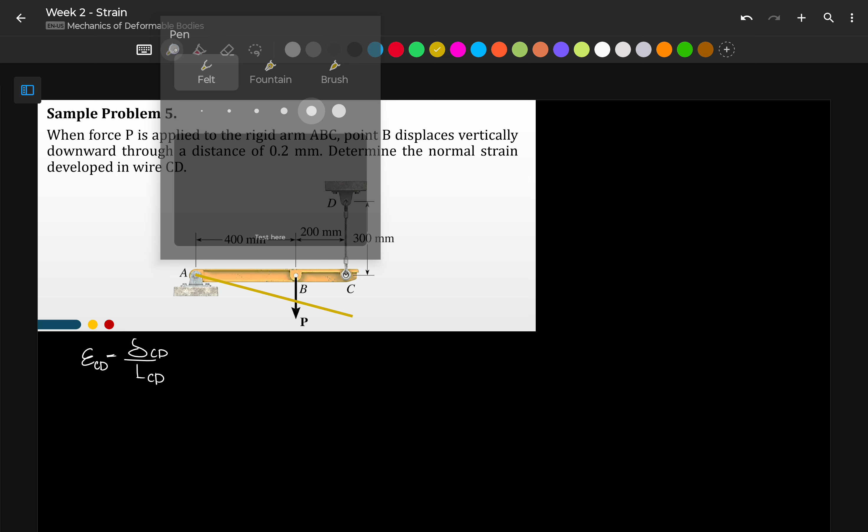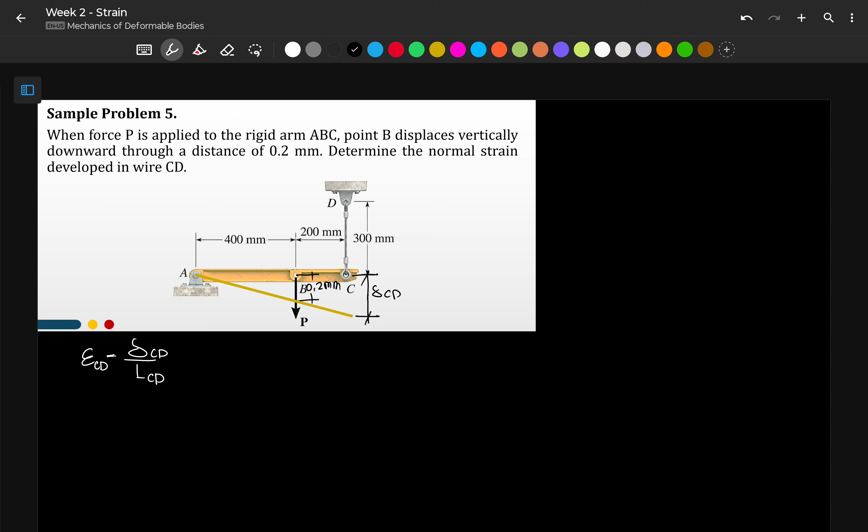Sorry for that. So ang nangyari is nag-deflect yung ating bar, yung rigid bar natin. So yung rigid arm na ito nag-deflect down ng 0.2 mm, and this point is our deformation CD. Now take note that the arm is rigid, therefore hindi siya magde-deform in any way. So perfectly rigid siya, straight line pa rin siya.

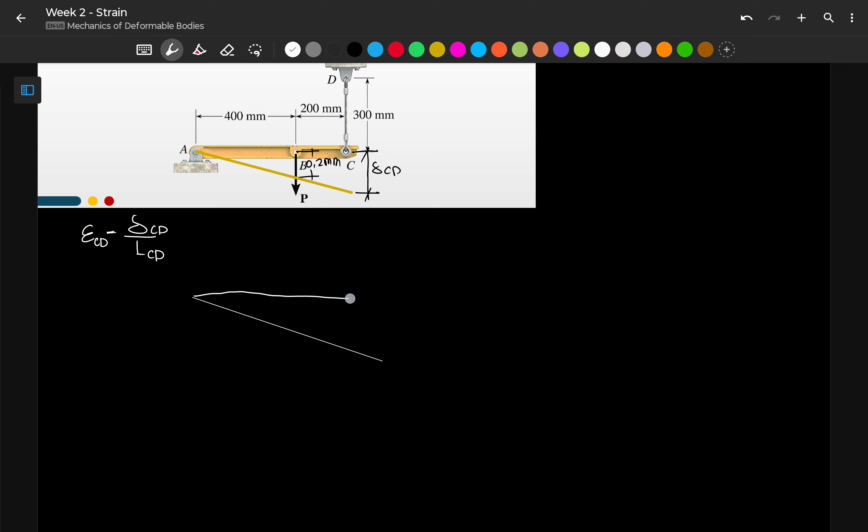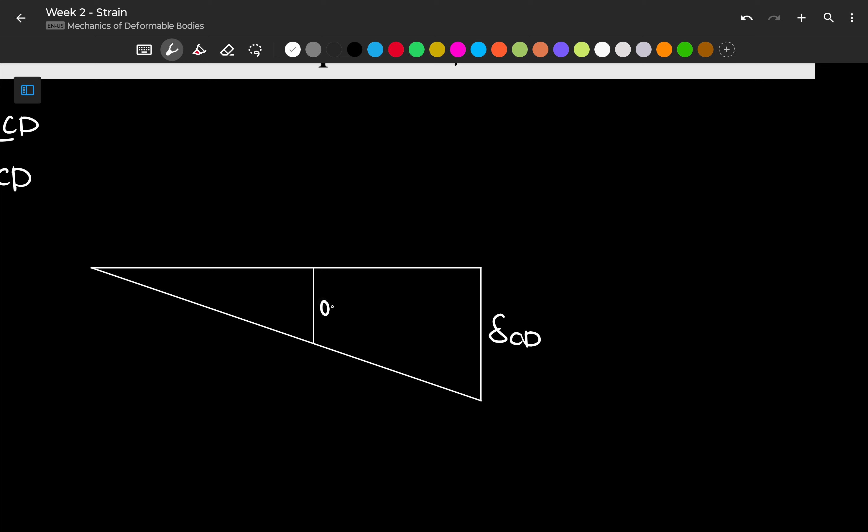So let's draw the deformation diagram. So what we have here is our rigid arm deformed, and this is our original position. At yung vertical distance, ito yung ating deformation CD, so let's call it deformation CD. And then at this point, we have a vertical line. Then this vertical line, sabi ng problem, ito yung displacement or yung deflection na 0.2 mm.

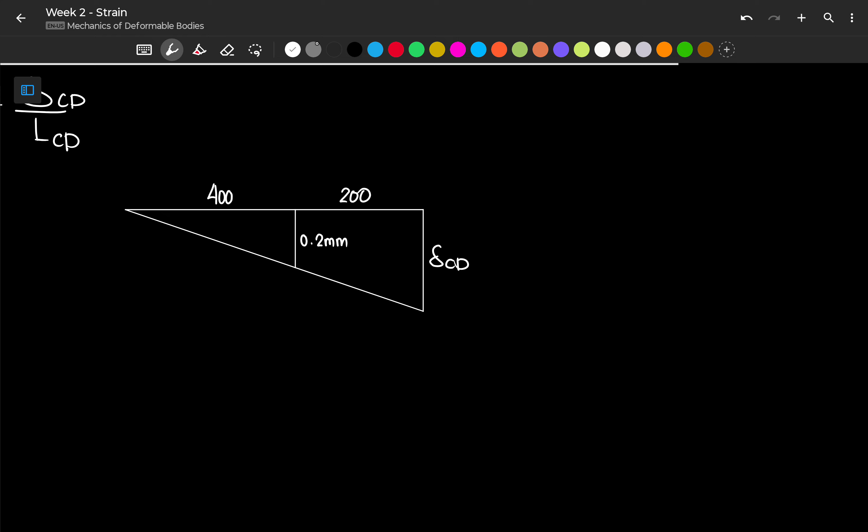And the distances are 400 dito, and then meron naman tayo ditong 200. So dito pwede tayong gumamit ng similar triangle theorem or yung ratio and proportion. That is, yung length ng mas maliit na triangle, which is this one, okay, the length of the smaller triangle over its height, that is equal daw dapat sa length ng mas malaking triangle over its height.

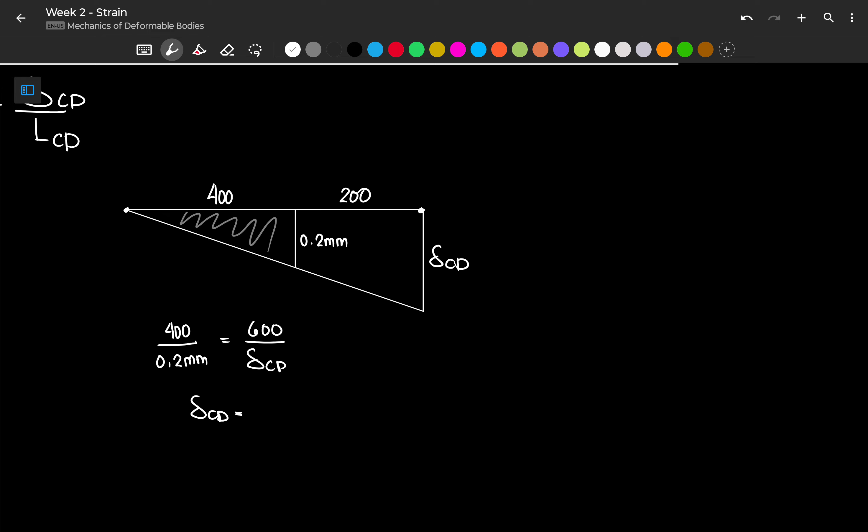Okay, so yung maliit na triangle, we have 400 yung kanyang length, yung kanya namang height ay 0.2 millimeter. That is equal sa length ng mas malaking triangle from here to here, that is 600, over deformation CD yung kanyang height. So our deformation CD is 400 over 0.2 times 600, we have 600 times 0.2 over 400. We have a deformation of 0.3 millimeter.

So maliit lang yung deformation. Since we have the deformation, we can now calculate the strain as the deformation 0.3 millimeter divided by our length na 300 millimeter. Yun yung original length niya, yung haba nung ating kable mula kay point D hanggang kay point C, which is 300 millimeter. So our strain is 0.3 over 300.

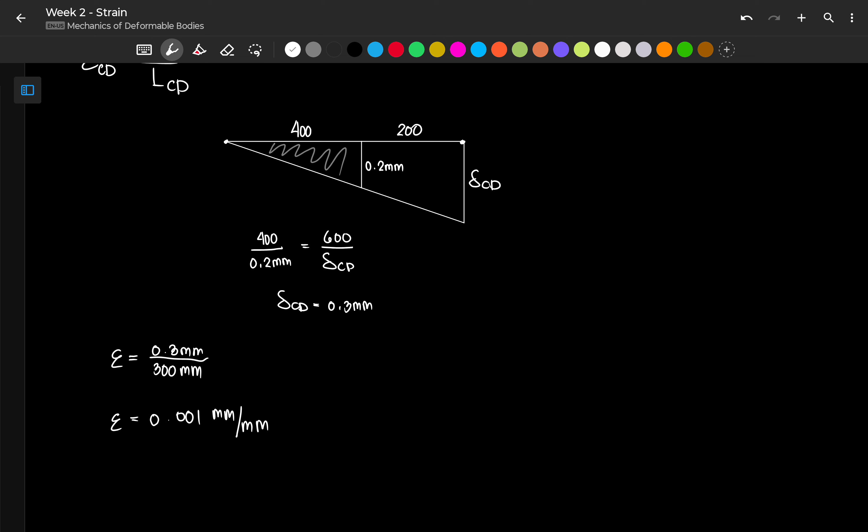That is 0.001 millimeter per millimeter. Okay, ibig sabihin, kada isang milimetro ng ating material, ang kanyang deformation ay 0.001. We can also say na pwede rin niyang 0.001 meter per meter. So the unit of strain is millimeter per millimeter, or pwede rin namang meter per meter.

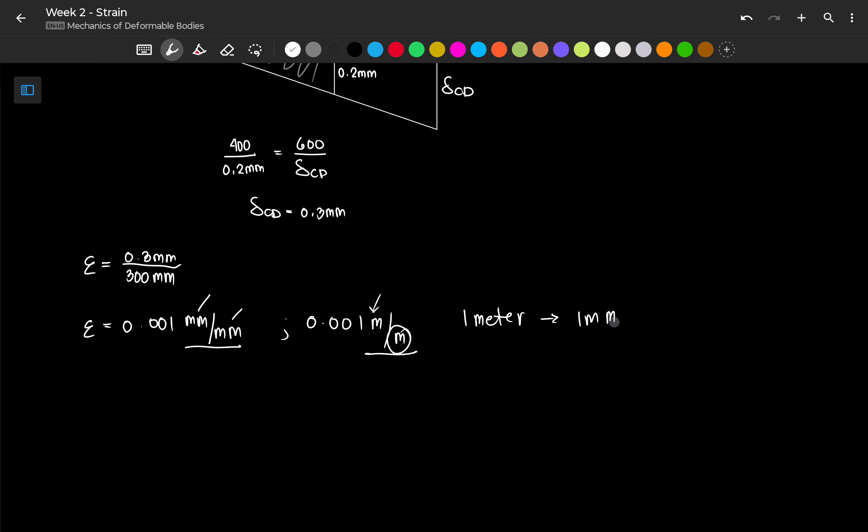Basta siya ay length over unit length, kasi dati siya ay deformation over length. Okay, so we can say na every 1 millimeter or every 1 meter, kada isang metro, merong 1 millimeter na deformation doon sa ating wire.

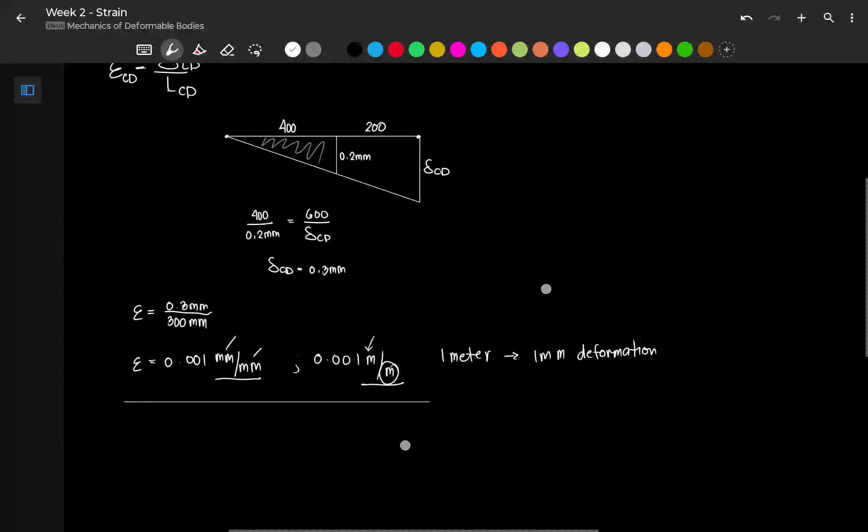So ito yung ating sagot, kahit alin dito pareho lang po yan. Okay, so pwede rin unitless, sometimes yung strain ay treated as unitless value.

Let's proceed with the next problem. Sabi dito, two solid cylindrical rods are joined at B and loaded as shown. So rod AB is made of steel with E equivalent to 200 gigapascal, and rod BC of brass with E equal to 105 gigapascal.

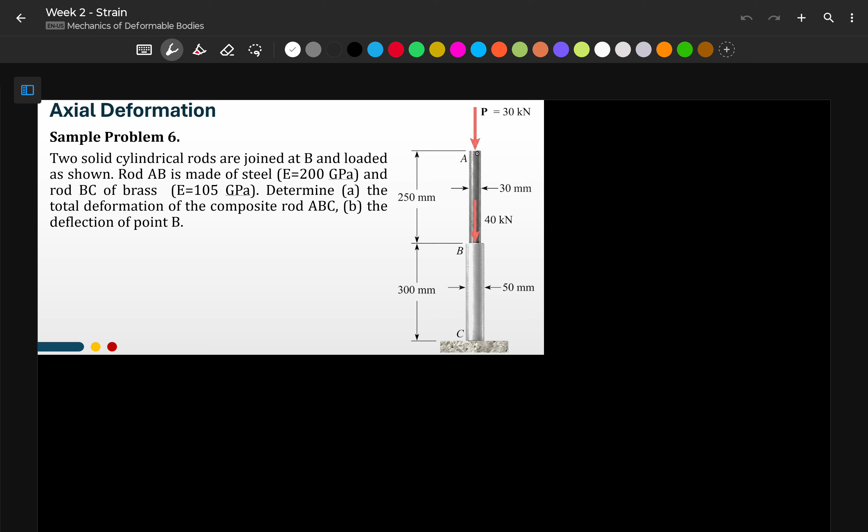Determine A and B: letter A, the total deformation of the composite rod ABC, and letter B, the deflection of point B. So dalawang tanong sa atin. Una, the total deformation of our rod ABC, yung buong rod natin na ito. So if we want to solve for letter A, ang sabi sa atin, total deformation, that is the sum of the deformation natin sa AB plus yung deformation natin sa BC.

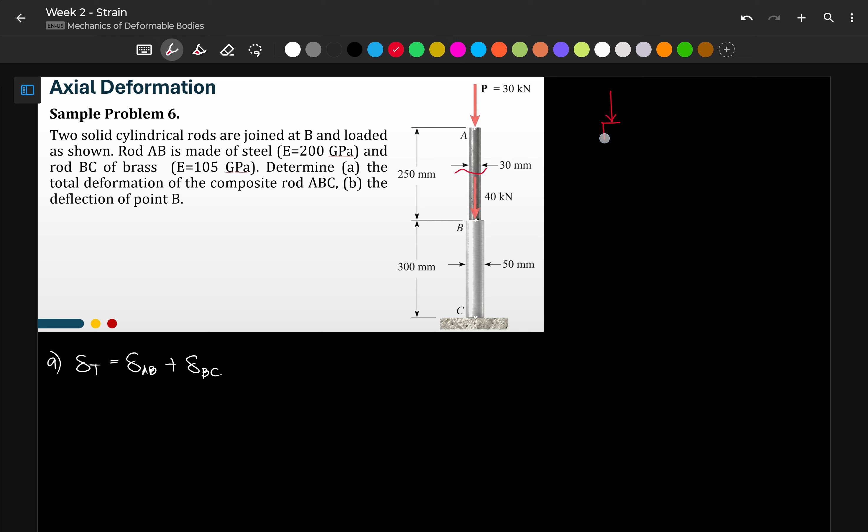Okay, so if we cut a section here, pag nag-cut tayo ng section dito, meron tayo ditong P na 30. Then meron tayong internal reaction, this is 30 kilonewton. Then magkakaroon tayo ng internal reaction, let's say PAB. So this internal reaction, by summation of forces vertical, we have PAB is equivalent to 30 kilonewton.

Then next, we have the lower member which is the member BC, so i-cut naman natin dito. Ang maiiwan sa atin sa itaas, nandyan pa rin yung AB. Then we have, ano ba tawag dito, this is what, a brass rod. Okay, so ito ay meron pa ring applied load na 30 kilonewton, then dito meron tayong 40 kilonewton, then meron tayo ditong reaction.

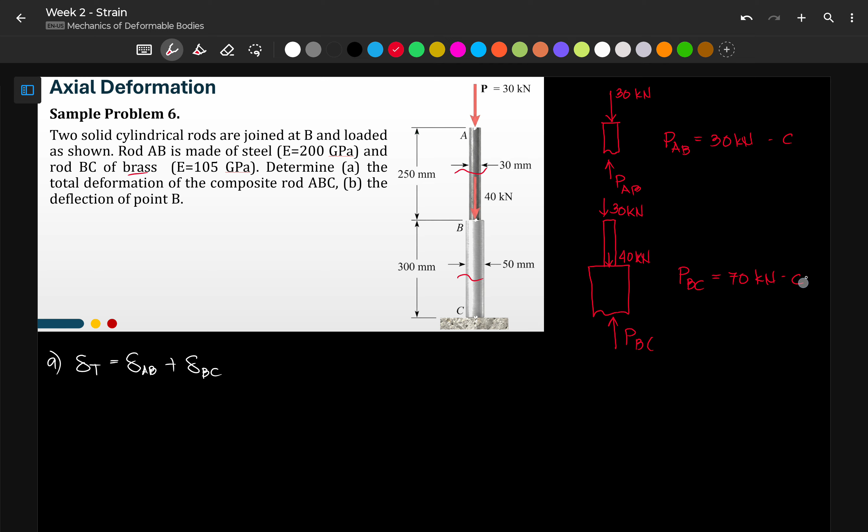Let's call it PBC. By summation of forces vertical, we can say that PBC is equivalent to 70 kilonewton and they are both in compression, meaning nagko-compress yung ating material. So kung kailangan ng notation or symbol to distinguish yung ating deformation, pwede tayong maglagay ng positive or negative — positive for elongation, negative for shortening. Or pwede rin nating ilagay yung word na elongation o shortening. Okay, so kahit alin doon, tama.

Ngayon, since meron na tayong force, that is our step 1. Given naman yung dimensions natin, the diameter of each rod, so mako-compute natin yung area. So pwede na natin kunin yung deformation. Our total deformation now is equivalent sa deformation ng AB plus BC. So instead na solving ko ng buo, solving ko muna isa-isa — yung deformation ng AB muna.

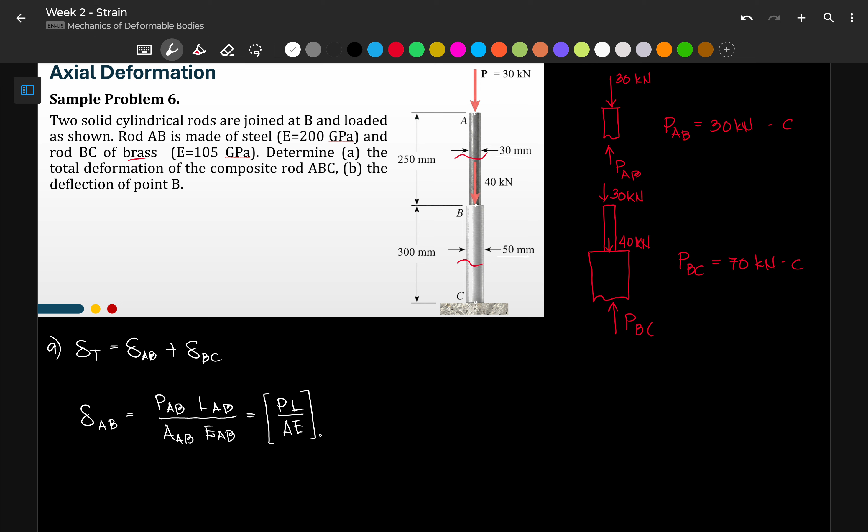So the deformation ng AB, that is equivalent sa P ng AB, length ng AB, over the area ng AB, multiplied sa E ng AB. Minsan sa pagsusulat ko, para hindi na siya maraming sulat ng subscript, ang ginagawa ko na lang, nilalagyan ko nito, tapos may subscript dito. Ibig sabihin yan, lahat ng variable dito ay para kay AB. Okay, so let's solve for the deformation sa AB.

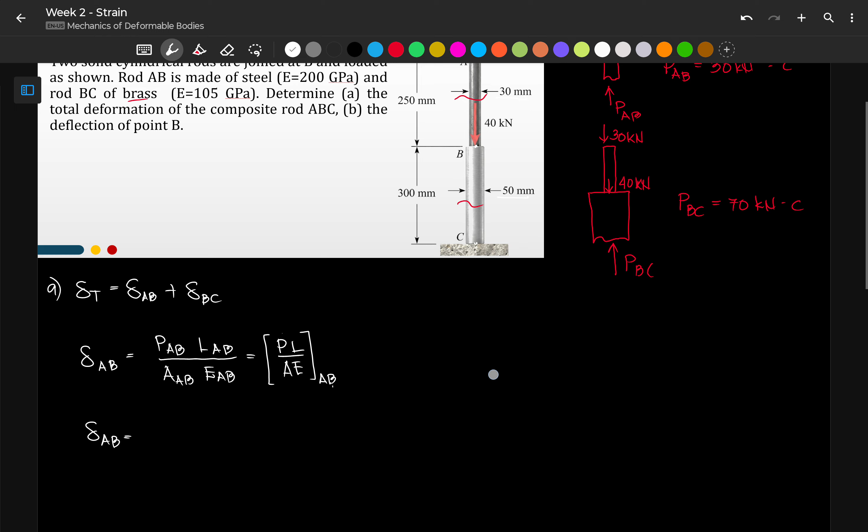Ang PAB natin ay 30 kilonewton, so that is 30 times 10 to the 3 Newton. Then our length for AB, that is 250 millimeter, divided by the area — may diameter tayo, 30 millimeter yung diameter. So the area is pi over 4 times 30 millimeter squared.

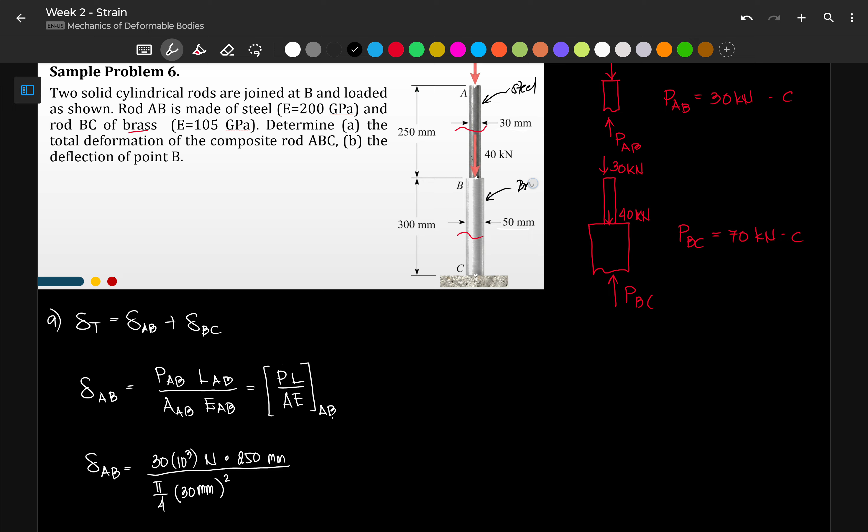Lastly, our modulus of elasticity — since AB daw is made of steel, and BC is brass. So our E is 200 gigapascal, that is 200 times 10 raised to 3 Newton per millimeter squared. Cancel na yung unit ng millimeter dito kasi may square din siya. Matitira sa atin, cancel na rin yung Newton, ang matitira ay millimeter.

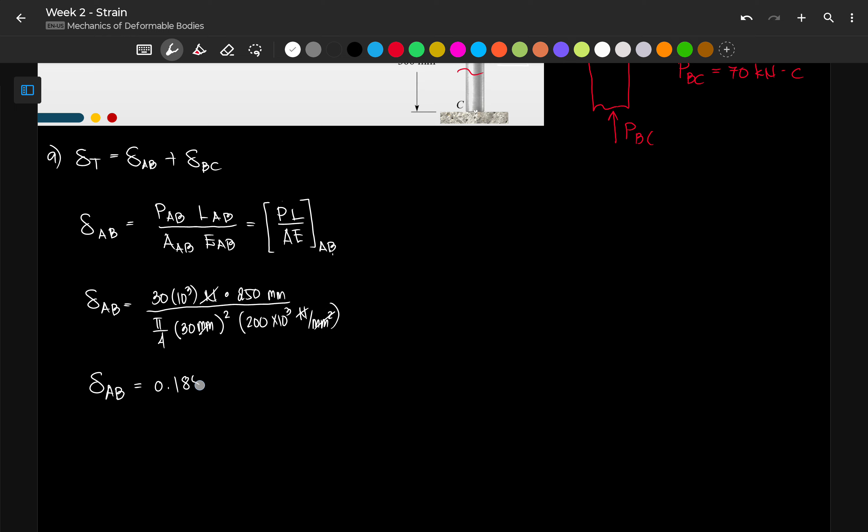So the deformation of AB is: we have 30 times 250 over pi over 4 times 30 squared times 200. We have here 0.1857 millimeters. Okay, next let's solve for the deformation ng BC.

So the deformation at point BC naman, that is equivalent to PL over AE ng BC. So that is our P, 70 times 10 to 3 Newton, times our length is 300 mm, divided by our area — the diameter is 50 millimeter squared, multiplied by our modulus of elasticity for brass, that is 105 gigapascal, or 105 times 10 to 3 Newton per millimeter squared.

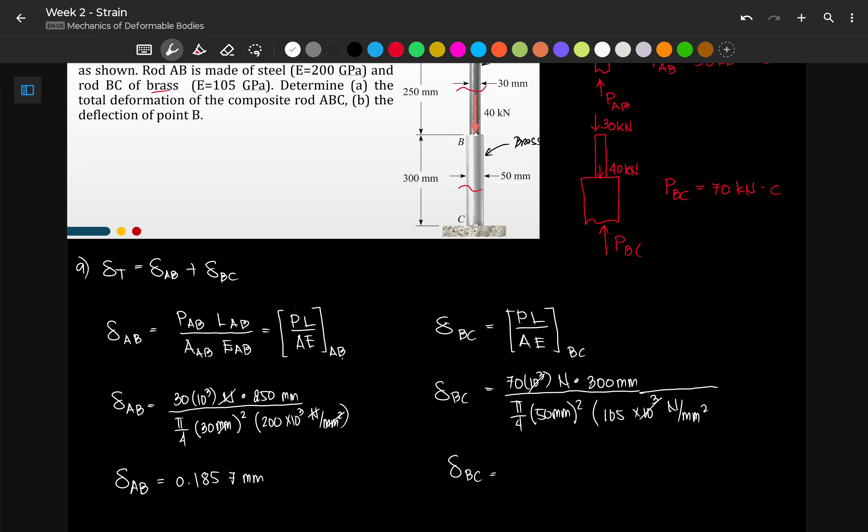So in this case, our deformation BC is 70 times 300 over pi over 4 times 50 squared times 105. Pwede naman kasing tanggalin itong times 10 to 3 dito, ayan, pareho lang naman yan, so pwede nating i-remove yan para hindi tayo masyadong maraming tinatype. So the deformation on BC is 0.1018 millimeter.

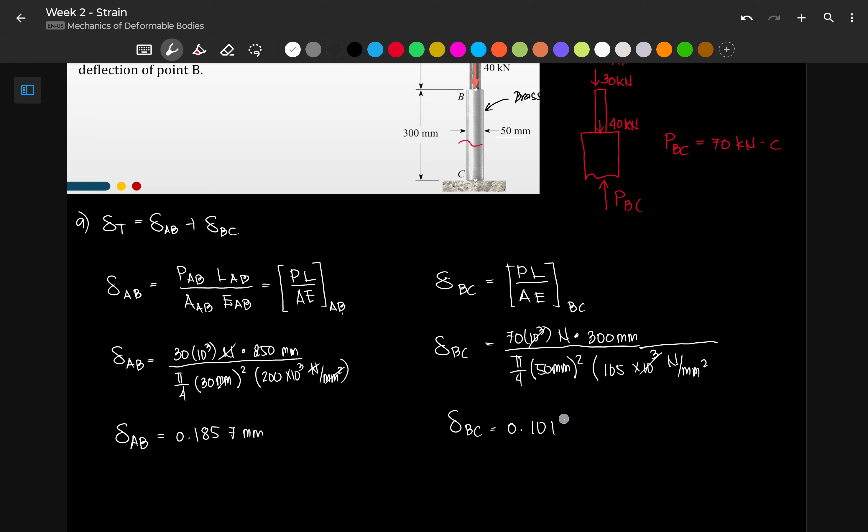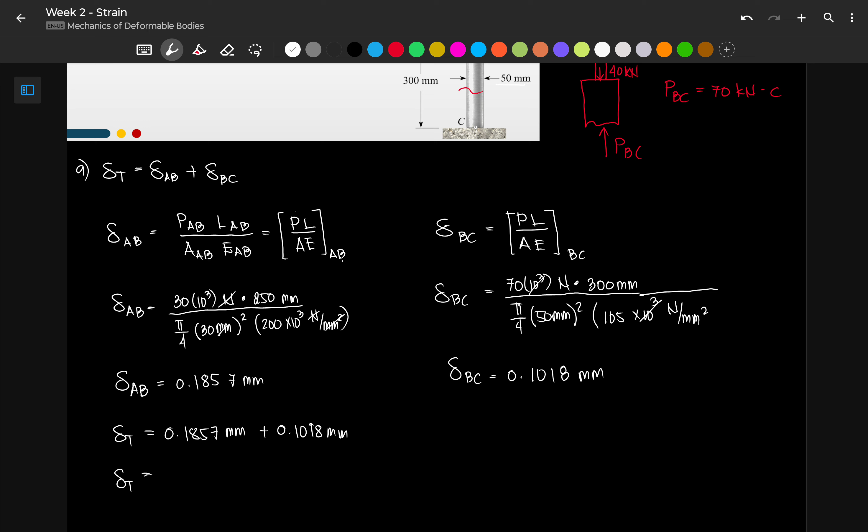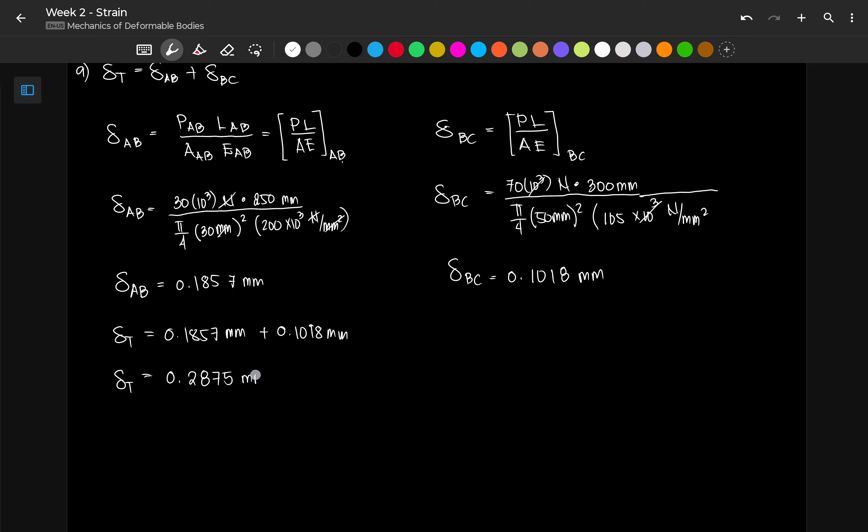And our total deformation is 0.1857 plus 0.1018, medyo nagmamadali na naman tayo magsulat dito. So we have here 0.2875 millimeter. So that is our total deformation, answering our question letter A.

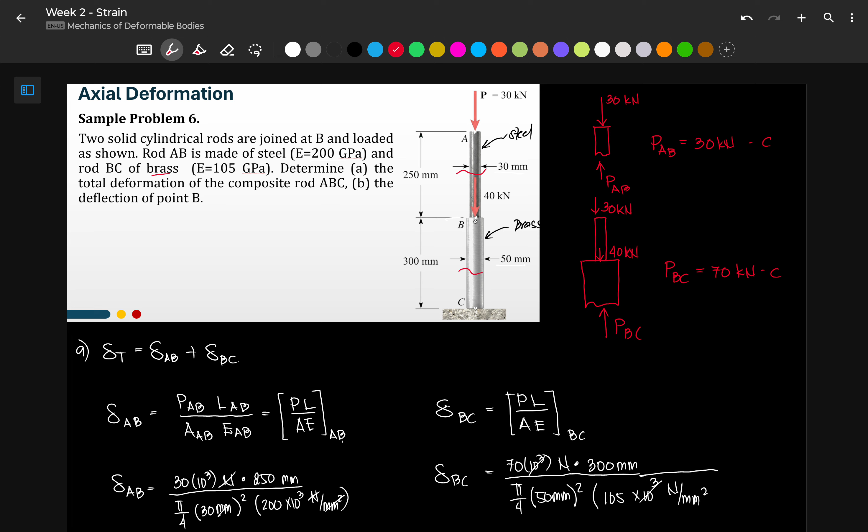So for letter B, ang tanong lang, deflection at point B. Meaning, bababa itong point B natin pagka nag-deform yan. Pag in-applyan natin ng load, ang tendency, mako-compress yung ating material, bababa. So ang mangyayari, kung yung ating original setup is ganito, okay.

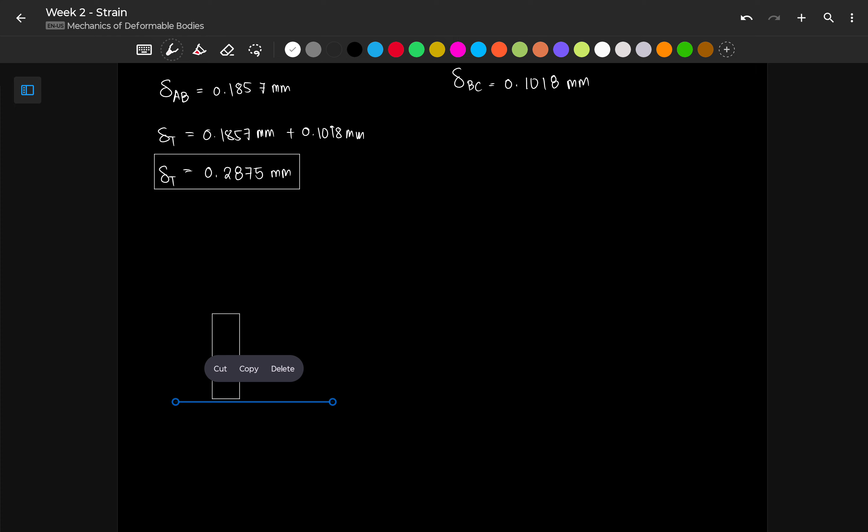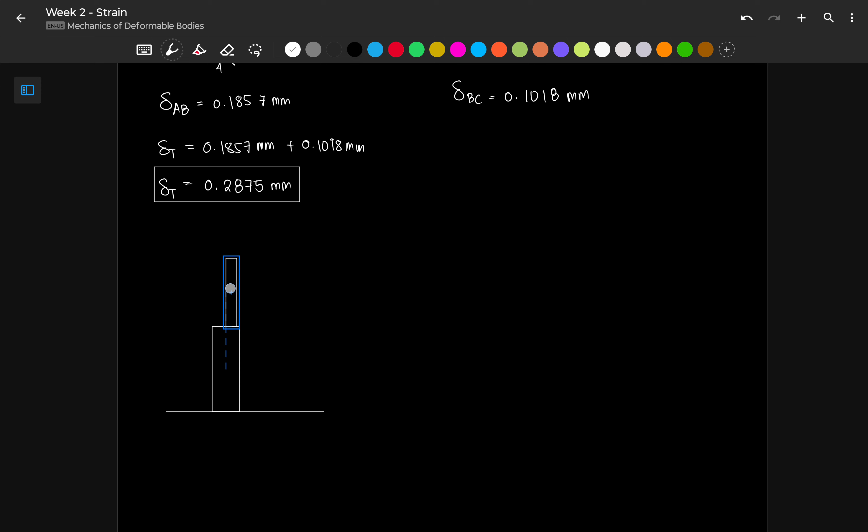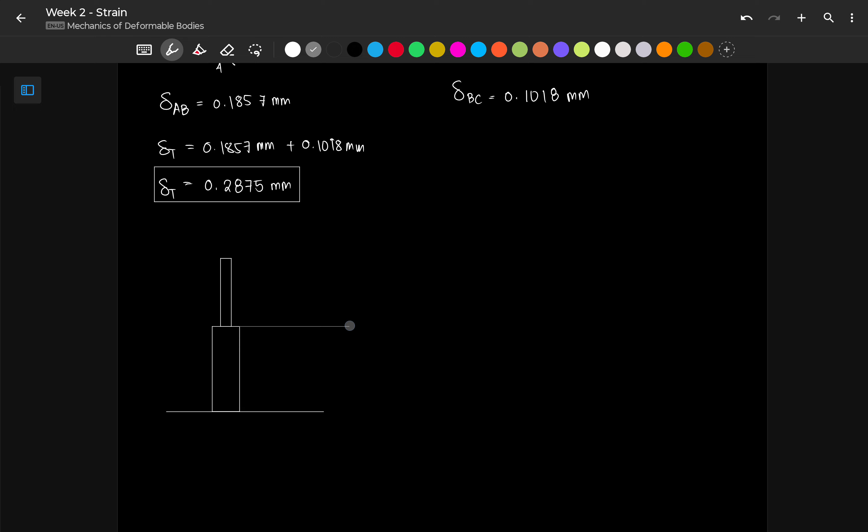Palitan natin ito ng white. Okay, then — ayan. So kung ganito yung original position natin, ang mangyayari kasi dyan, magko-compress. So what will happen is, isa-isahin ko yung compression para ma-visualize natin. Okay, so draw lang ako ng reference line dito ng point B. I-isolate natin si member AB — this is A, this is B, this is C.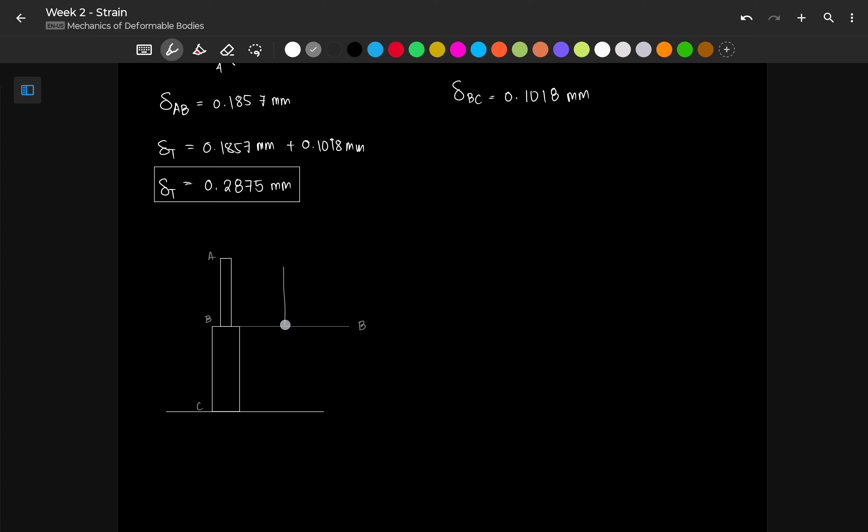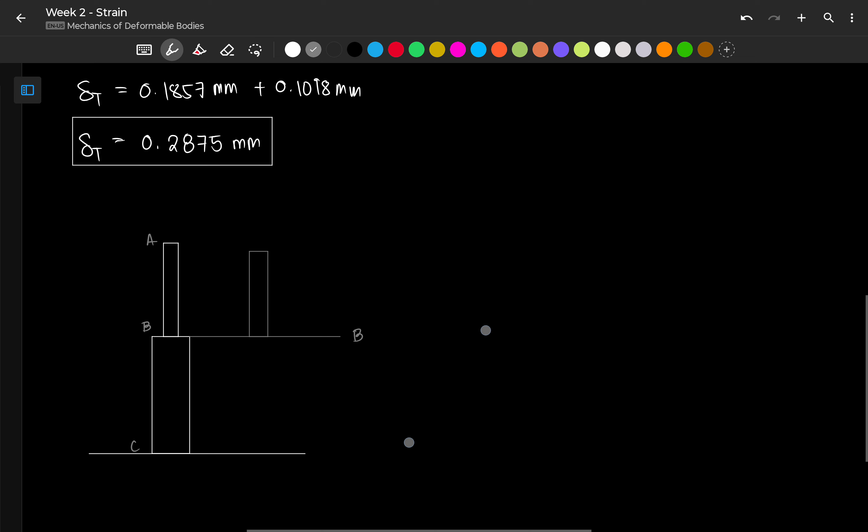Si member AB, ang nangyari sa kanya, nagkaroon siya ng deformation na 0.2 millimeter, so ang tendency, bababa siya dito. And then, similarly, si member BC, nagkaroon din ng deformation, so ang tendency niyan, si member BC, bumaba din.

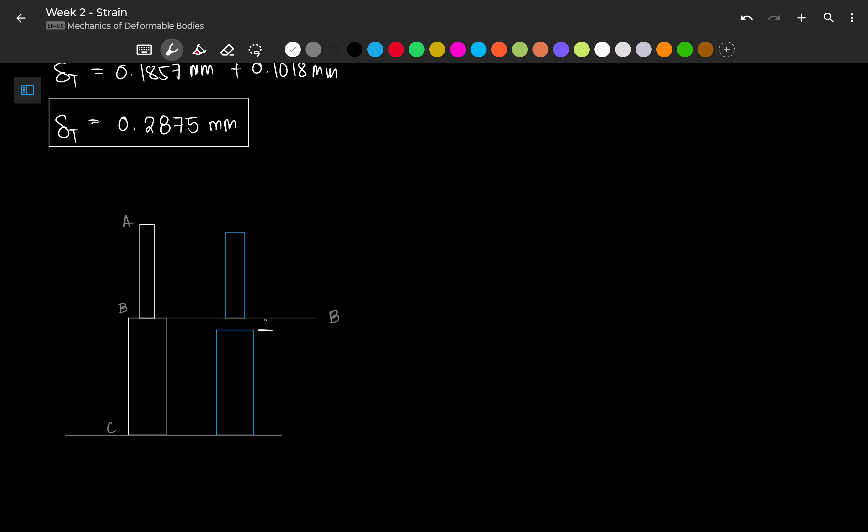Okay, so basically, after the two deformations that happened, ang nangyari doon sa ating member, sa ating point B, bumaba papunta dito. So yan yung tinatanong na displacement. Sometimes yung displacement na to is called deflection, at denoted din siya by delta — delta kasi is the term we use for change. Yung delta na yan, delta rin na ganito yung ibig sabihin niyan, no? Okay, so parehong delta yon.

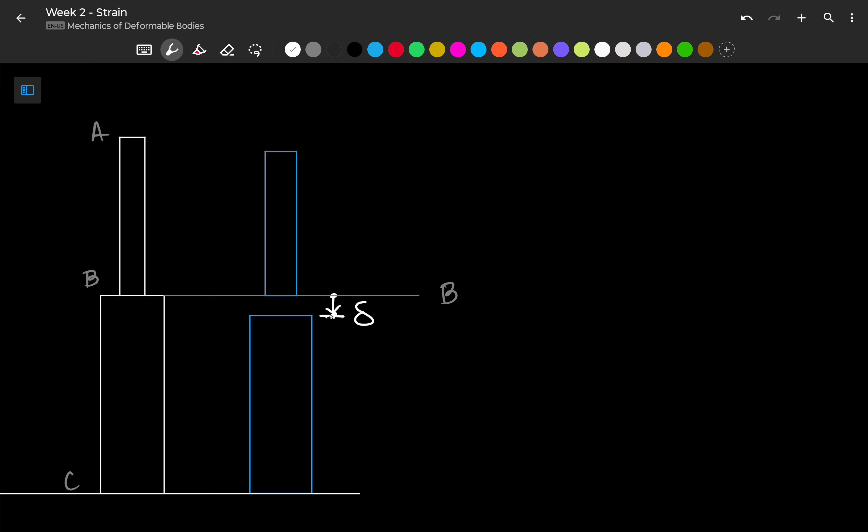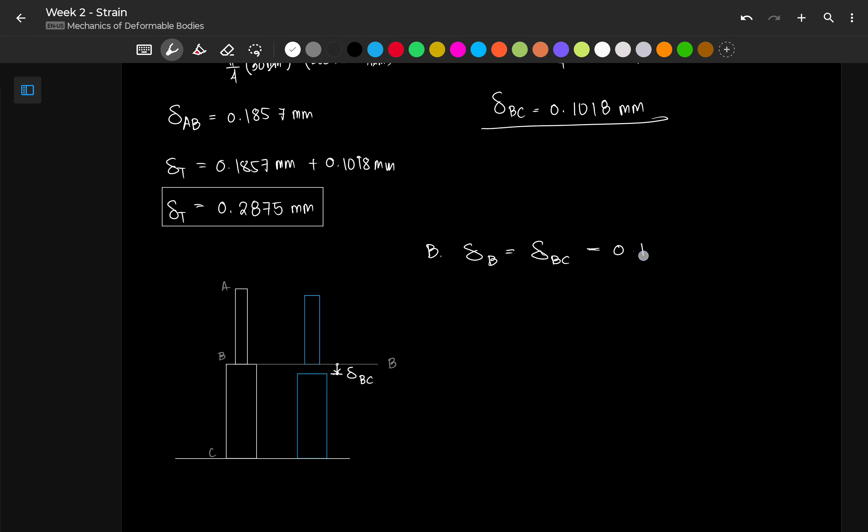Therefore, in this case, ang deformation lang or deflection lang ng point B is equivalent sa deflection o deformation ng ating BC. So the answer for letter B is the deflection at point B is equivalent sa deformation ng member BC, which is 0.1018 millimeter. Okay, so ang mangyayari kasi dyan, bababa lang itong member na to dito, kukonek lang siya. Okay, and ito yung ating total deformation.

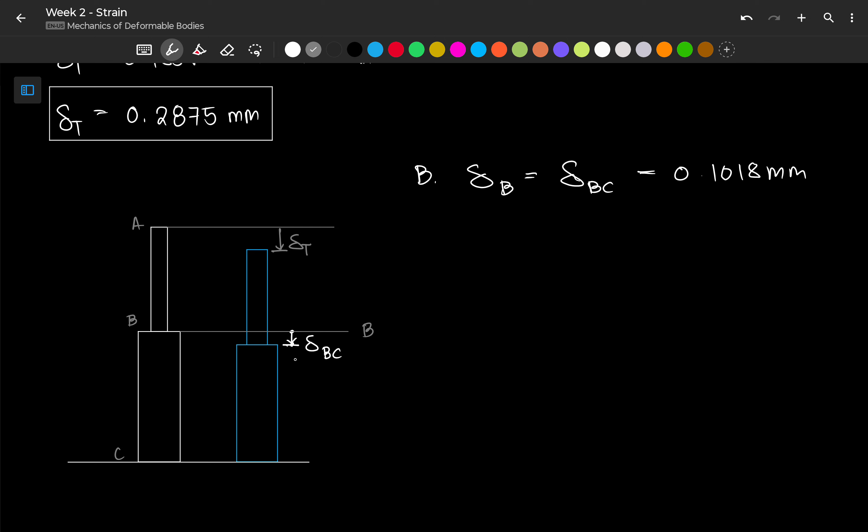So, mula dito hanggang dito, ito yung ating total deformation. So this point is just the deformation BC. Okay, that's it for this sample problem.

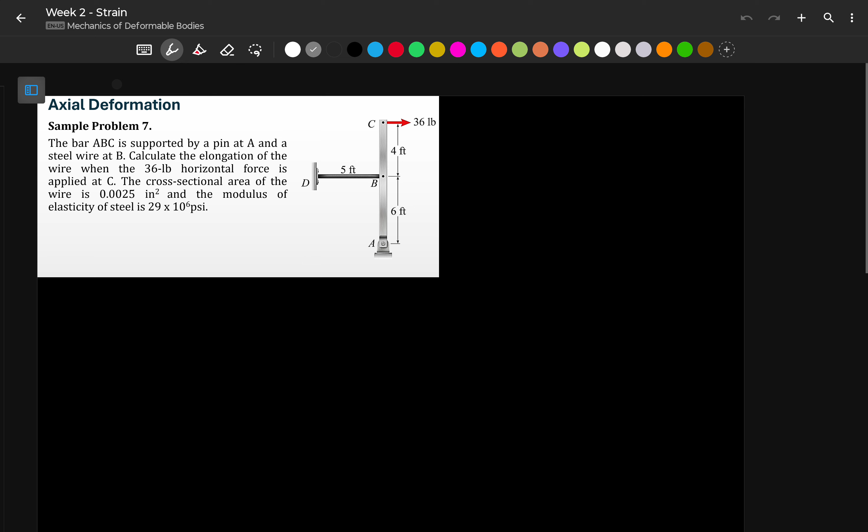Let's move to our last problem for our axial deformation. The bar ABC is supported by a pin at A and a steel wire at B. Calculate the elongation of the wire when the 36-pound horizontal force is applied at C. The cross-sectional area of the wire is 0.0025 square inches and the modulus of elasticity of steel is 29 times 10 raised to 6 psi.

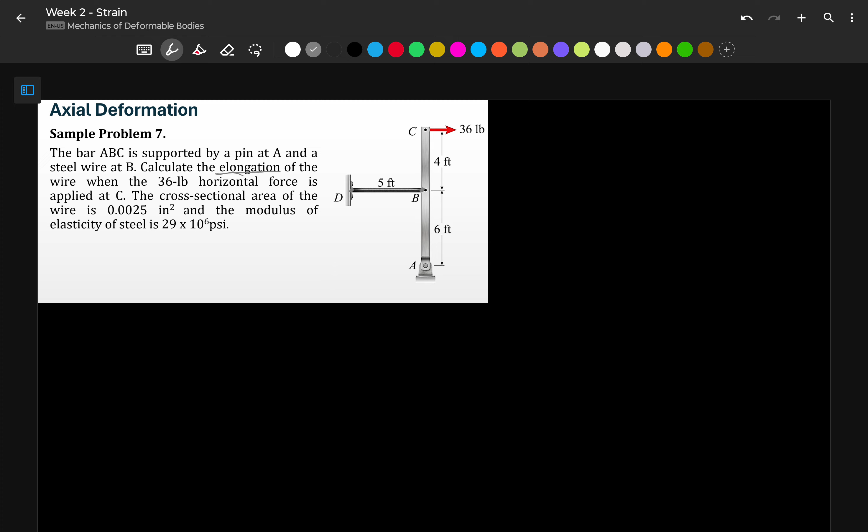Again, ang una nating ginagawa when we are trying to find the deformation is to identify the forces, unless forces yung hinahanap. Pero the first thing that we need to do is identify the force. Ang pinag-uusapan lang dito is we have to calculate the elongation of the wire, ito yung wire na nagko-connect. Mukha lang rod kasi kumapal yung pag-generate ko ng image, but this is a wire.

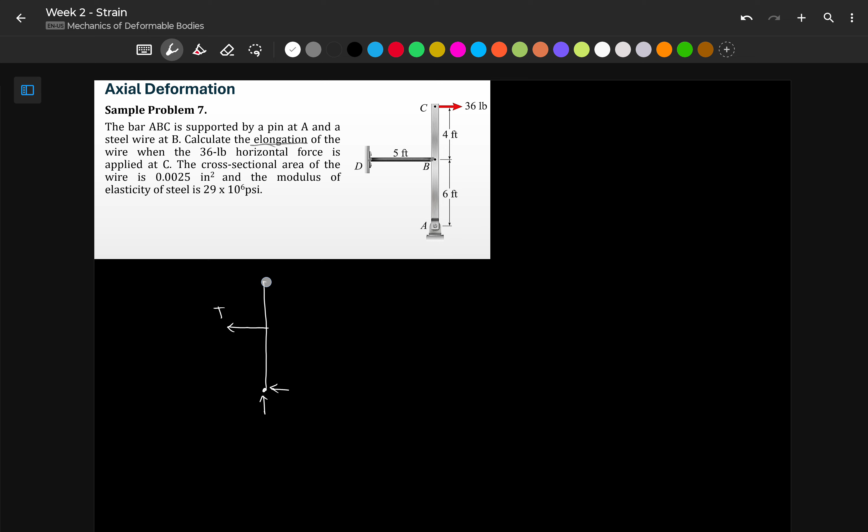So what will happen here is yung beam natin or yung rigid bar natin supported by a tension wire here. Then meron ditong vertical at horizontal reaction dahil meron kang pin, and may applied na 36 pounds.

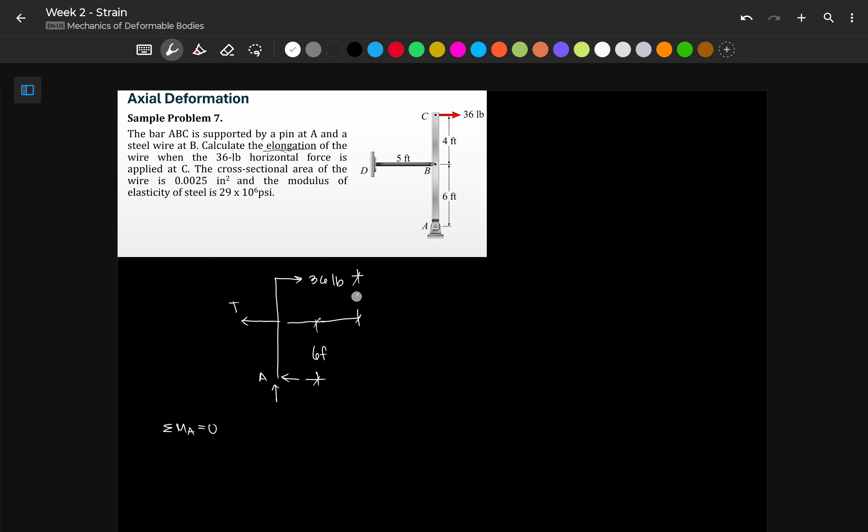So if we take summation moment at this point, let's take summation moment at A equal to 0. Our distances: this one is 6 feet, and up to the load we have 4 feet, so these are the distances. Dito, assuming clockwise positive, we can say na kung ito yung ating moment center, magmo-moment ng clockwise si 36 pounds, and our moment arm is 10 feet, the unit of it is feet. Then wala na tayong clockwise.

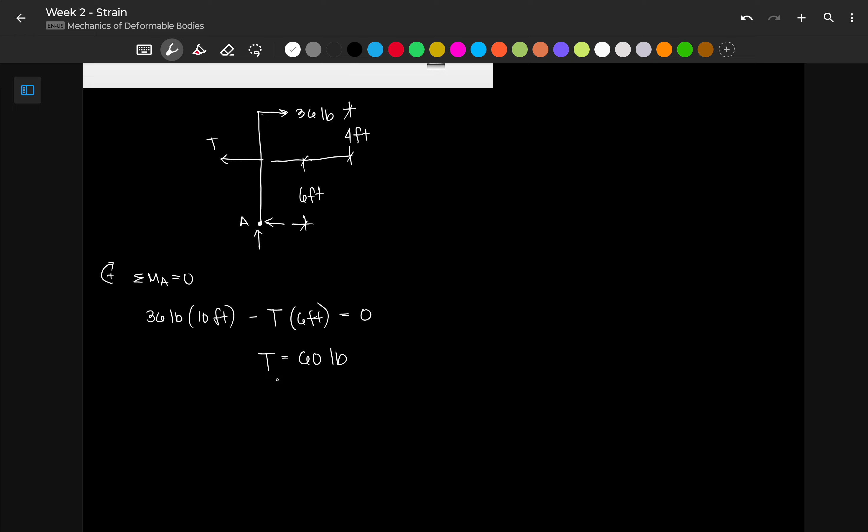So what we have is a counterclockwise tensile force coming from our support wire, that is T, and ang moment arm naman niya ay 6 feet, and that is equal to 0. So our T is 36 times 10 over 6, 60 pounds. Better sure than sorry: 36 times 10 over 6, we have 60. Correct. So that is our force, 60 pounds.

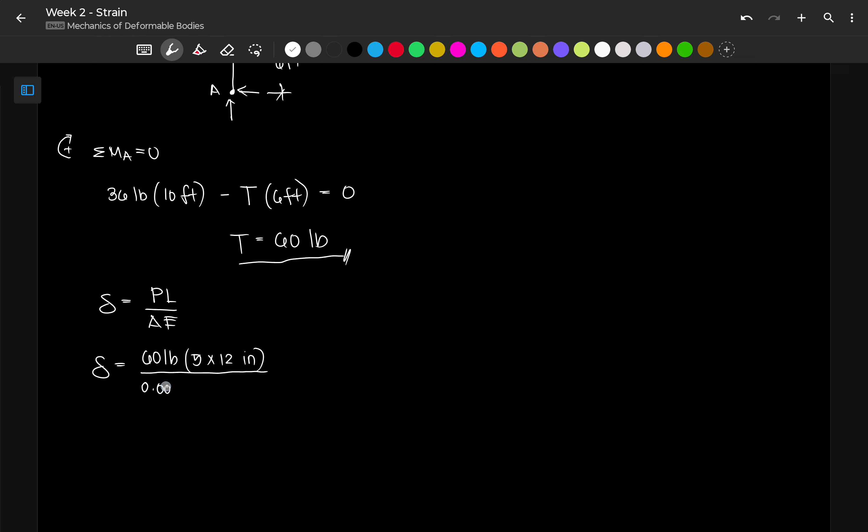Now, since we have the force and the area, we can now determine our deformation. Deformation again, that is just PL over AE. Our P is 60 pounds, the length of our tension wire is 5 feet. Gawin natin tong inches para uniform yung ating unit, so that would be 5 times 12 para siya ay maging inches. The area is 0.0025 inches squared, multiplied by the modulus of elasticity na 29 times 10 to 6 pounds per inches squared. So cancel yung pounds, cancel na yung inches squared, matitira sa atin na inches.

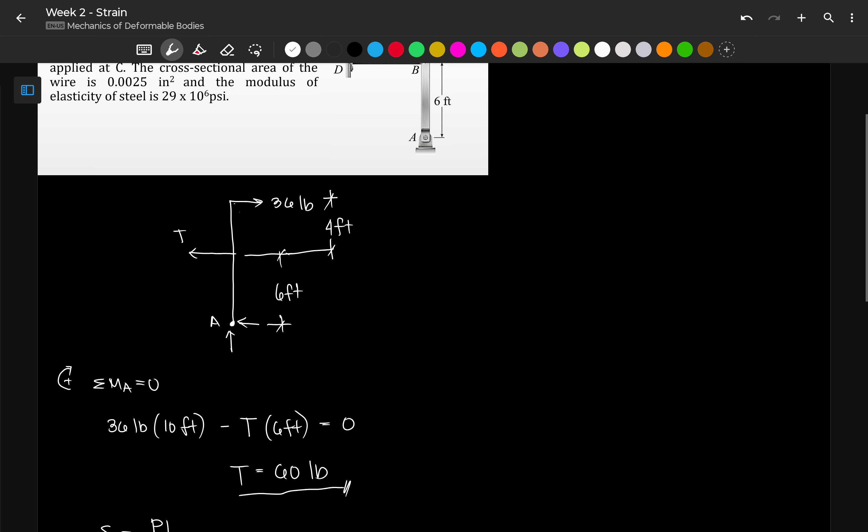The deformation here is 60 times 5 times 12 over 0.0025 multiplied by 29 times 10 to 6. We have 0.0497 inches. So that is our deformation on the wire BD brought by the 36-pound horizontal force.

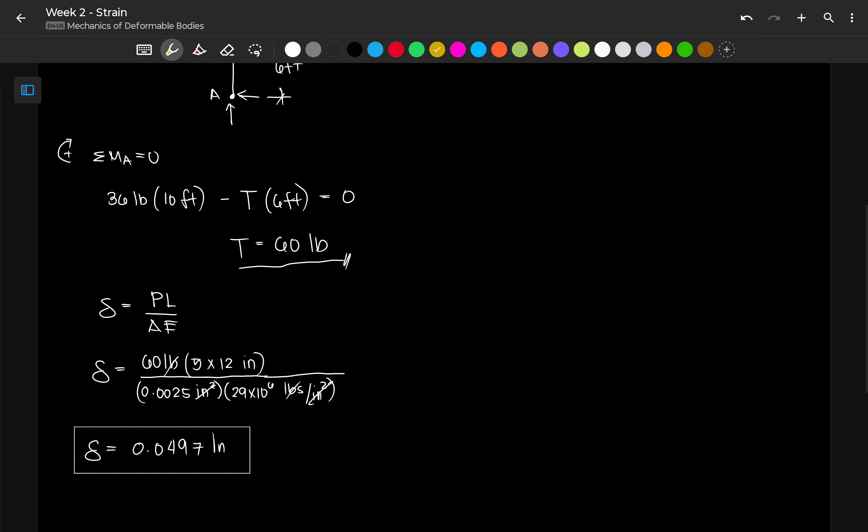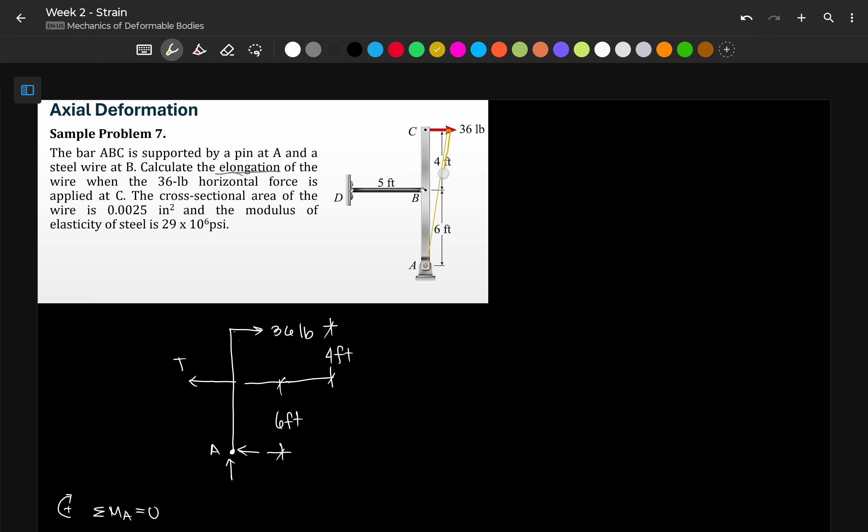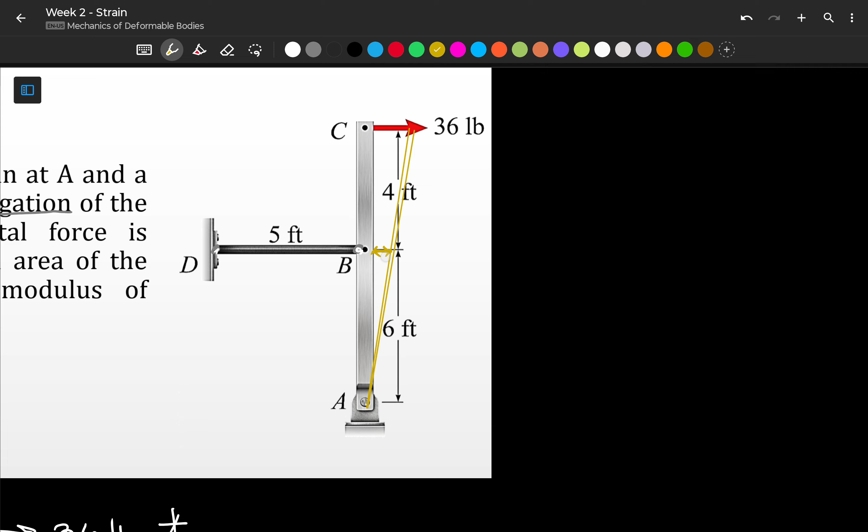Now, there are questions na ang tanong dito is kung ito ay nag-deform ng 0.0497 inches, ano daw yung magiging angle of rotation? Ang gagawin lang natin, if meron tayong ganyan, magde-deform dito yung bar natin, dito na mapupunta si bar ABC. Ngayon, kung ito na yung ating bar ABC, ito yung deformation na nakuha natin ngayon, pwede tayong gumamit ng triangle para makuha yung angle of rotation at this point kasi magro-rotate itong bar na to.

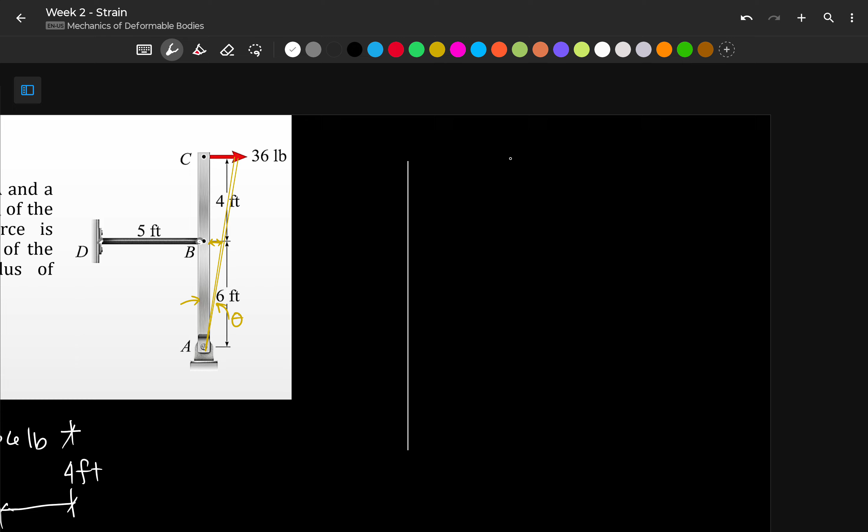And rotation is one of the deformations na meron tayo. So what will happen here is, maraming beses po kasi natin gagamitin yung triangle dito sa mga problems ng deformation. This is the original point, this is our final point.

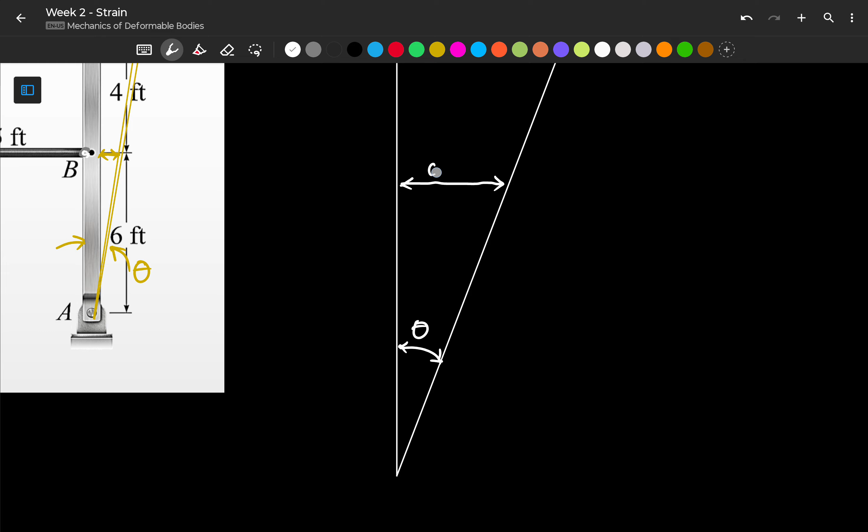Ang hanapin natin is yung angle dito, angle of rotation theta. Sabi natin, ang deformation at this point is 0.0497 inches. Then our length here, from the figure, is 6 feet. Naka-feet ano, so hindi naka-inches, we have to convert it later on.

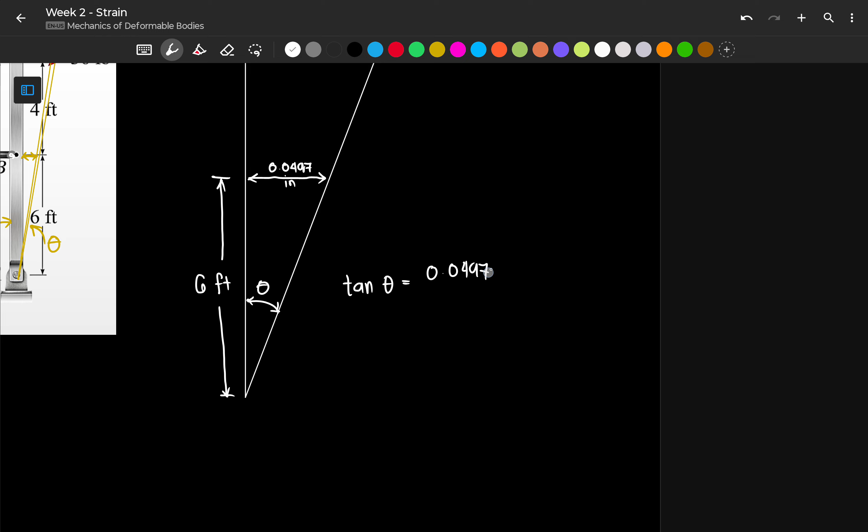Since meron tayong opposite, may adjacent, we can say that the angle of rotation is solved by tangent theta equivalent to 0.0497 inch divided by our 6 feet, which is 6 times 12 inches, which is 72 inches. So our theta is the inverse tangent of 0.0497 over 72. We have an angle of rotation na 6.902 times 10 to negative 4 radians.

Convert natin to into degrees, shift mode. That is roughly around 0.0395 degrees na rotation. Okay, so additional questions lang ito.

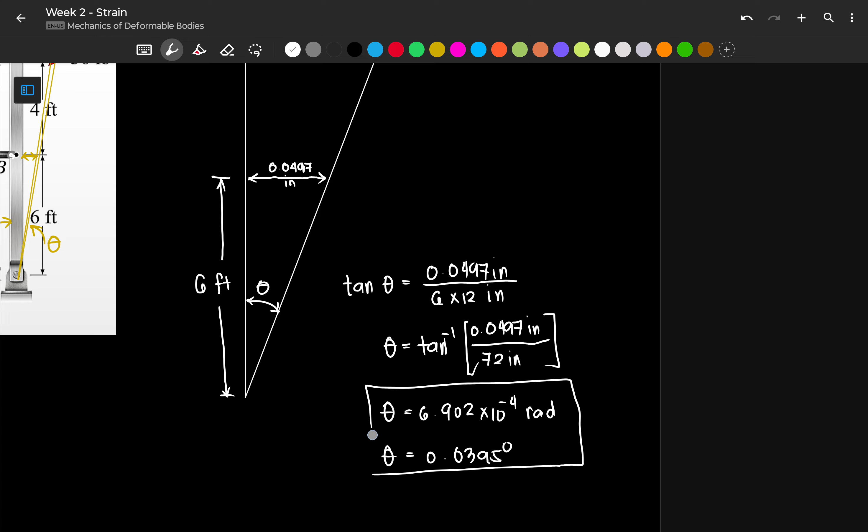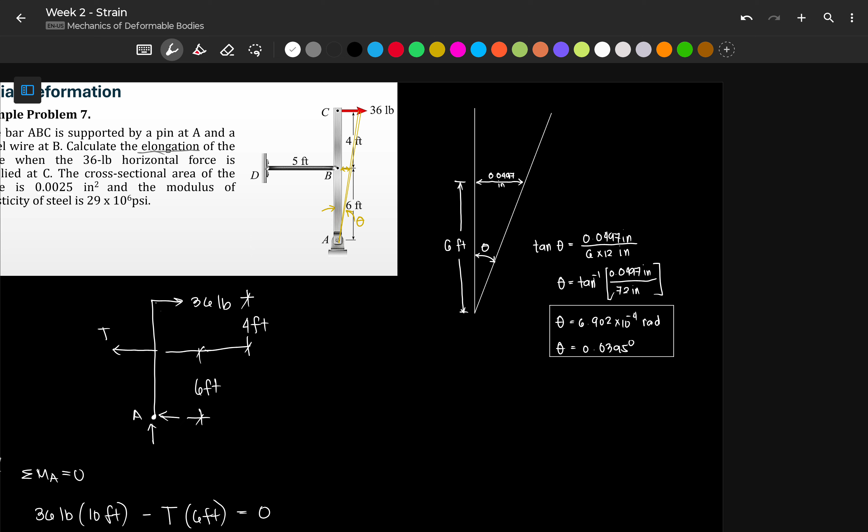So if ever na itanong, you can use triangle. Napaka-importante ng basic knowledge natin sa trigonometry dito: sines, cosines, ano pa ba, tangent, kagaya ng ginamit natin ngayon, similar triangle theorem. Okay, so theorems on angle, those are the important concepts na magagamit natin later on.

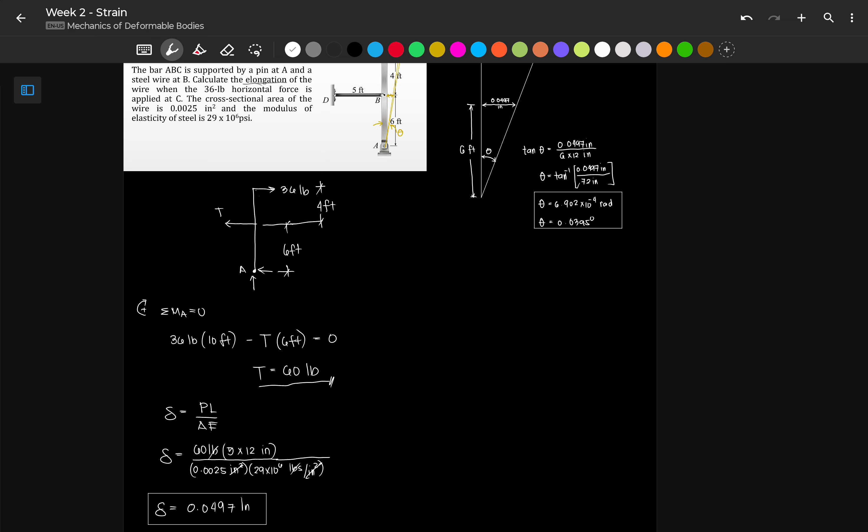Okay, so that's it for the part 1 of our strain. Let's proceed now on our statically indeterminate sections or statically indeterminate structures. See you on the next video discussion.